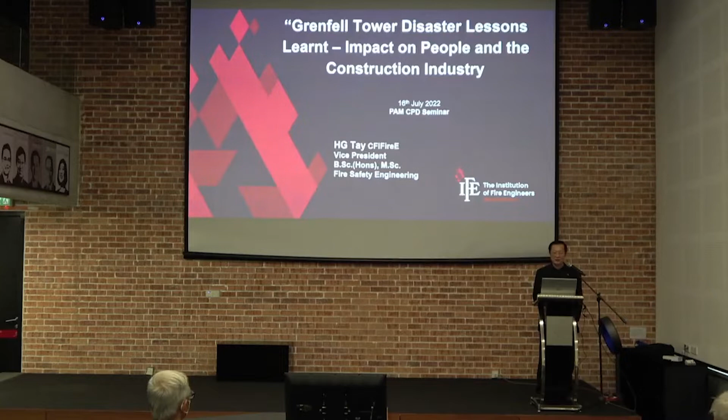I will share with you that the lady, Judith Hackitt, was asked to actually conduct an investigation. And actually, a lot of professionals found at the end, can a fire disaster be prevented? The answer is definitely yes, provided all construction stakeholders carry out their duty diligently. That means everybody, from the government down to the professionals, down to the AHJ, down to the manufacturers, suppliers, contractors, and the like. Everybody carry out their duty diligently, with competency.

I'm not saying that fire will never happen. Murphy's Law, you can never stop a fire from happening. The question is, are you ready to handle one? Are you prepared to handle one? Or are you ready to actually try to minimize the risk that a fire can happen? If not, don't ever think that Grenfell Tower can only happen in the UK.

Okay? Now, if you look back at Malaysia's history, we never have had a major fire with a high fatality rate for the past 20 years. And a lot of what I call stakeholders are assuming that we will never have a fire. I think if you are familiar with statistics, you find that that statement doesn't hold water. Right? Probability-wise, if you understand statistics and probability, if you do not have a fire in the last 20 years with high fatality rate, we are actually getting very close to one. Okay?

Grenfell Tower has just passed its 5th anniversary. But the court proceeding is still going on after 3 years. They divided it into 3 phases. First one is to investigate what happened during that night. Second one, they are looking at interviewing all the stakeholders, or whoever, any party that is connected to the case, who will have to testify in court, cross-examined by the lawyers.

And then now they're actually interviewing all the victims. The court proceeding has run into 83 weeks and it's still ongoing. And if you have time, you can go in and actually listen to some of the proceedings. And it's very, very interesting. You find a lot of facts, all right? And a lot of wrongdoings, a lot of faults, a lot of flaws, even in the entire legislative system and structure.

Hopefully, you can learn from this disaster and try to minimize the risk of a major disaster in Malaysia. We always say, do not go through the painful experience yourself; try to learn from other people's experience. And then we can look forward and progress with lesser pain and suffering. So what went wrong is being reviewed during the court proceedings, and it's so interesting, including ex-ministers admitting they did not do something correctly.

Grenfell Tower posed the highest fatality rate since the Second World War. Just imagine, we used to look towards UK as a model. But after the fire, the UK Ministry of Housing actually looked outwards towards 3 Commonwealth countries to have a better understanding of what these countries are doing in terms of fire safety policy and practice. They picked Canada, Australia, and surprisingly, Malaysia.

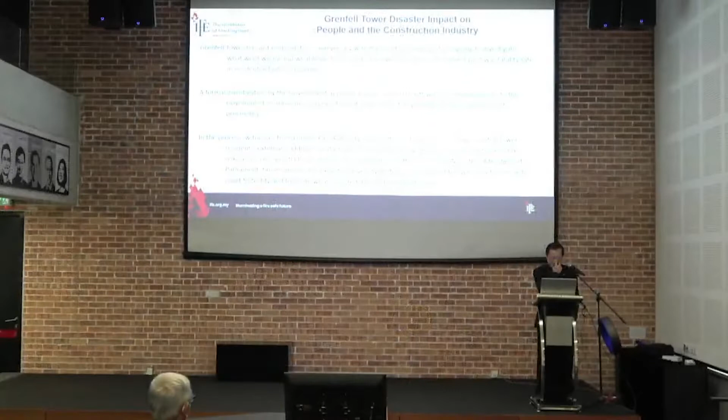During the investigation, a lot of interviews were conducted with London Fire Authority senior officers who were at the site that night, firefighters on duty, Grenfell Tower residents who survived, external cladding manufacturers like Kingspan, testing laboratory officers, building controllers, fire risk assessors, architects, local councillors, government officers, former ministers, members of parliament, fire engineers, fire experts, university professors, and relatives of the victims.

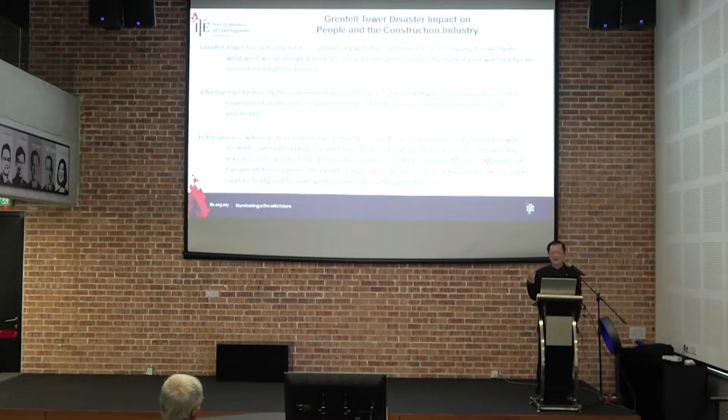They all were called to court to testify. And it's so interesting to look at this. When you go to court, you get no chance to explain what you're doing because a lawyer will only ask you yes or no. So there's no defense, because the court case is moved in such a way.

Out of the 72 occupants that perished during the fire, and this is not the actual figure because there were a lot of occupants in that building that night who weren't registered and recorded, so the actual figure is actually much higher. There were also some illegal immigrants who took shelter in their friend's apartment.

Of the 72, 15 are people with disabilities. And they are now in UK debating whether they should look after this group of special people. My goodness.

Government actually reversed, made a 360-degree U-turn to not enforce the regulation for building owners to look after this group of people in UK now. Can you imagine? Here, we are looking towards how to give provisions to people with disabilities in high-rise buildings, in mega shopping complexes, because they are people who are not normal.

And can you imagine, 17 of the 67 children perished during this fire? They are the future. So the conclusion is the failure of the legislative system.

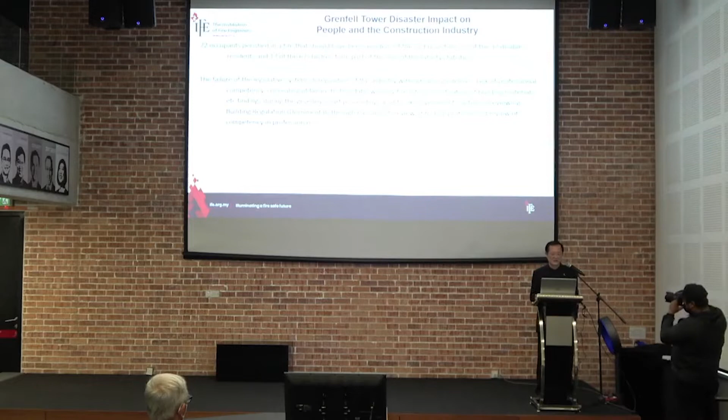So now, after this particular incident, document B, codes and standards in UK are all subject to review now because they cannot be used anymore. And the UK Parliament just passed a new fire safety bill, tightening up a lot of areas which are loopholes.

Small sample tests are no more reliable. All right, so now that's why we are going for BS 8414 test of full-scale external cladding systems.

The external cladding aftershock, which caused the Grenfell Tower fire, will also impact on the entire construction industry, where buildings are installed with external cladding of similar type as Grenfell Tower, or any other cladding that is combustible.

You know what happened is, now all the building owners understand this cladding is combustible. Now, if you are an apartment investor, do you want to buy one of these buildings? No. Okay? These are for new projects.

For the existing projects, the value becomes negative immediately. It's because the government's ruling is that all building owners who have external cladding that is highly combustible have to remove it at their own cost.

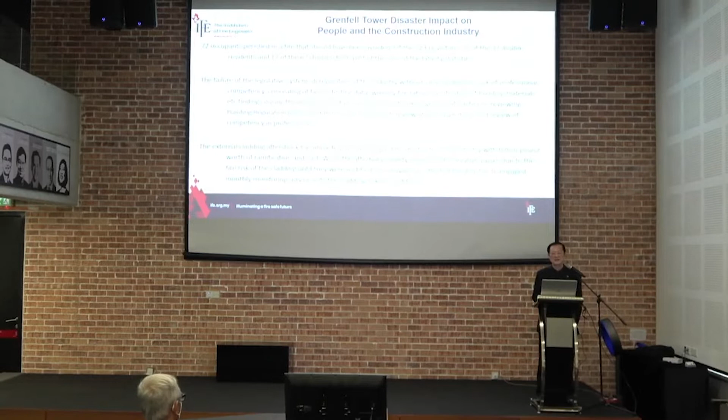Be very careful when you select external cladding, even though they are tested to BS 8414. Read the test reports. I think that's more important because most of the time professionals are so busy. I don't blame you, but if you do not read, you do not know how the system was tested, what material they use. The first line of defense is to go into the material science. Start looking at what they use. If it is highly combustible, you want to be very careful.

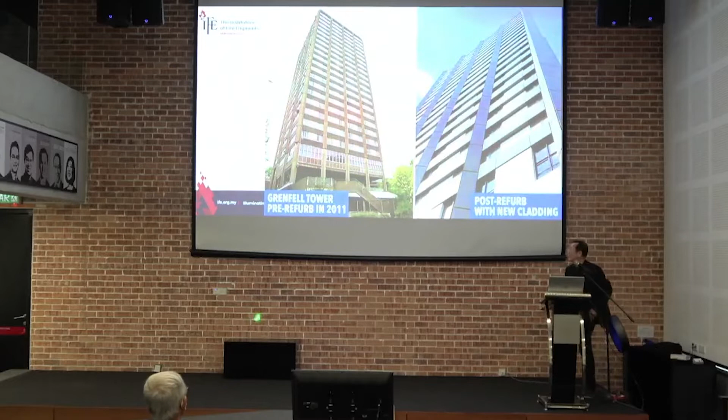That is the old Grenfell Tower. Now why it is being refurbished is because it's sitting - this property is a post-war building, and it's sitting in the Kensington area. It's a posh area where Princess Diana's palace is somewhere around the corner. So the local council think that it's an eyesore, so they refurbish. But out of the total sum allocated, zero sum is actually allocated for upgrading the fire protection system. In this particular building, there's no sprinkler system, the fire doors are failing, there's no pressurization system, they're using a single staircase. And worst of all is that they put highly combustible cladding externally throughout.

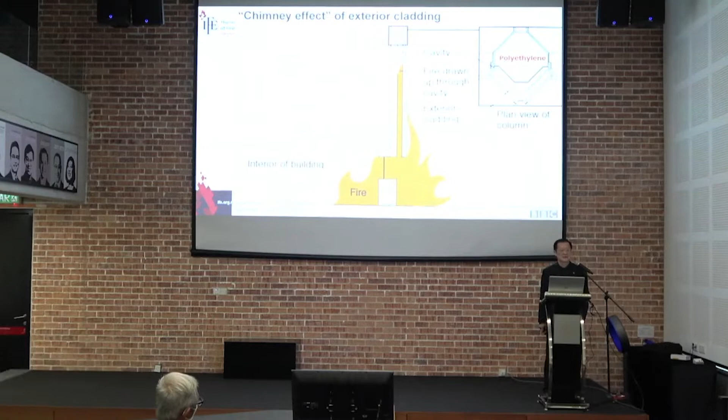This particular fire actually happened on the 4th floor, in a freezer. This freezer is actually a very famous local brand, bought over by a Chinese company. Instead of the metal casing, they changed it to plastic casing. And of course, during manufacturing, a lot of things were downgraded, and they had a fire.

London Brigade was actually called. They put out the fire and they left, but the fire reignited, and that's the end of the story. Fire broke the window, caught on the external cladding, and it spread like wildfire.

You can see the polyethylene is still there at some of the places.

Two types of smoke particles. Black is from organic material, wood and all that. When you see whitish or grayish, you better run - they are from synthetic material that is highly toxic.

I always joke, if you die, it's better during a fire. If you live and you inhale smoke particles that are carcinogenic, you might contract cancer, lung cancer, and suffer for another X number of years before you pass away, wasting a lot of money in curing.

So a fire is actually a very serious matter in terms of fire safety design, and I think the approach we have to take should be diligent.

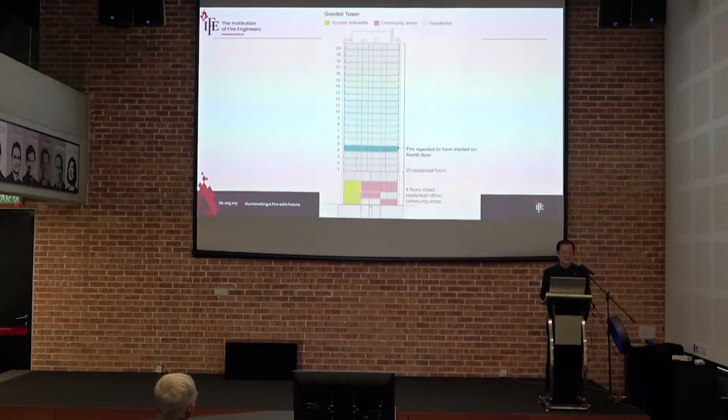So that is the side elevation of the Grenfell Tower, 20-story. Fire reported on the 4th floor. And this is actually an apartment, not a condo - an apartment.

Pre-war, there's not much regulation, so they designed it where all the apartments discharge into a common lobby, which houses a lift and a single fire escape staircase. Fire doors in the UK are generally only 30 minutes rated.

But after Grenfell Tower, the government decided to test all the door suppliers in the UK, and none of them passed the test of 30 minutes.

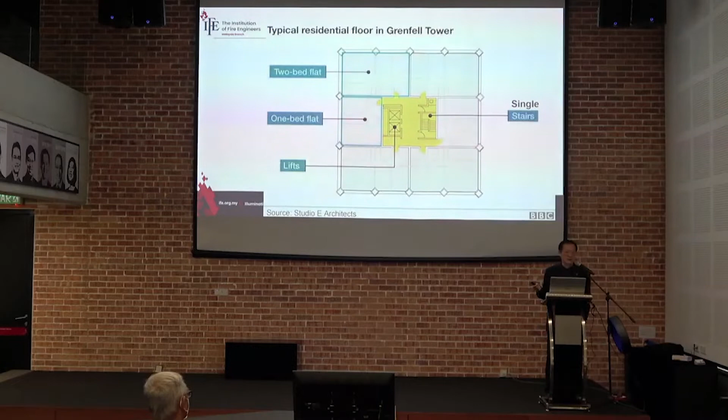You think Malaysia is doing better? Wait until I show you the photo.

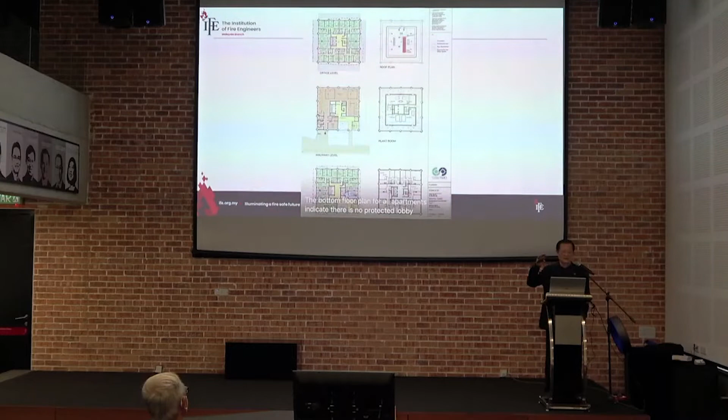So they have different configurations. As I say, below the 4th floor are actually shops, and above that, all apartments.

And what surprised me is the fire escape staircase - a single staircase that comes down from the 24th floor to the 4th floor, stops there. You've got to now travel through a corridor, I don't know whether it's protected, to another location to get down to the ground floor. So the staircase is not continuous.

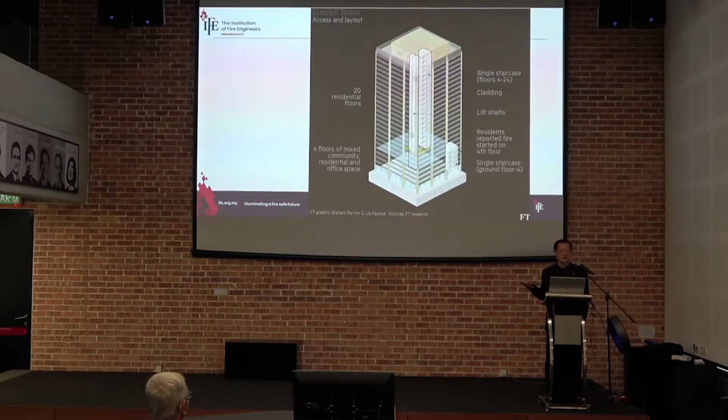I also do not know why the architect designed it this way. It's crazy, isn't it? Imagine the fire actually filling up the corridor and all that, including the staircase - what are your chances of egress?

Fire started here, and then because of the highly combustible cladding, it wrapped around the whole building at super speed. Okay, you look at that.

12:54 a.m. - that is the time when people started to go to bed. By 1:15, people on the 17th floor then start to realize that something is happening. By 1:30 a.m., the flame had already gone around the building. So it's actually a very, very short period of time.

There's no fire detection alarm system in the building, so you need your friends to actually inform you. Otherwise, you're high up above, you never know what's happening.

Even with the alarm ringing, let me ask you a question - how many of you really take a fire alarm signal seriously? When you hear a fire alarm in a building, do you walk out of the building, or do you still carry on shopping or doing your work? You want to think about that.

I always advise, when you hear the fire alarm, leave the building. Probably you'll be the one who has the last laugh.

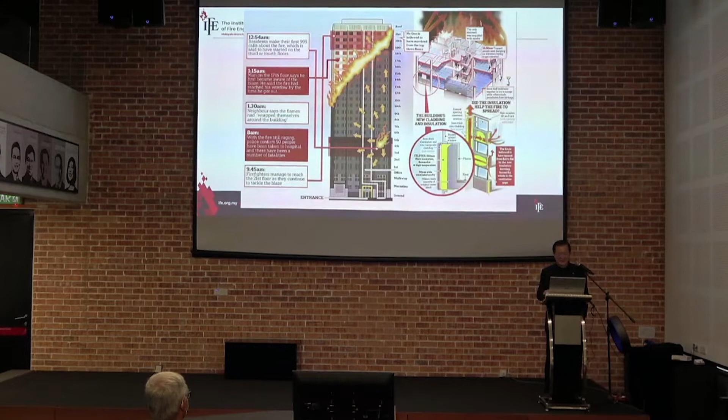Here this shows only one fire escape staircase. So I know a lot of architects are under pressure to actually design a single staircase. You want to think about that.

But I do have a solution whereby, if you do not sacrifice lettable floor area for low-rise buildings, you actually have a solution that we were already using 30 years ago. And it was abandoned - I also do not know why. Because all you need for low-rise is actually an alternate fire escape. It doesn't matter the shape, doesn't matter the size. Because it's low-rise, you do not have to actually enclose it like high-rise buildings.

Just now I showed you how the construction of the external cladding is configured. Okay, 6 inches of polyethylene attached to the building surface. They have actually a 50mm gap cavity, and then the finishes of aluminum outside.

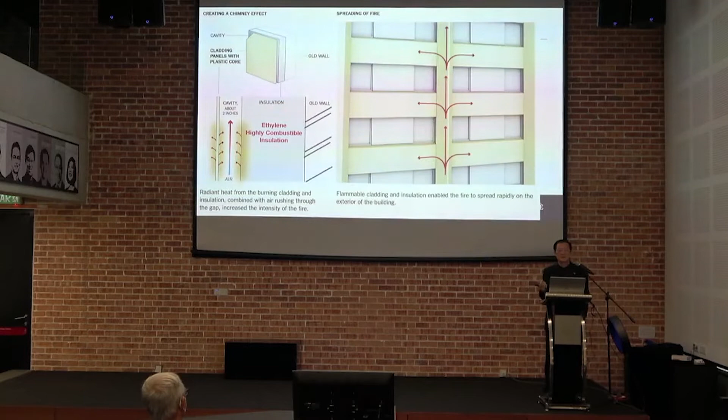If I was discussing with my peers, if the council only clad horizontally and forgot about the vertical column, then the fire is not too bad. Because when the fire started, it spread from here, and when it hit the vertical column, you just imagine, vertical fire spread is faster than horizontal. So it goes up, and then it starts to spread like a tree. Okay?

So I always say, why do you have to do something that actually encourages a disaster? If it stopped there without the vertical cladding, then the spread would not be that bad.

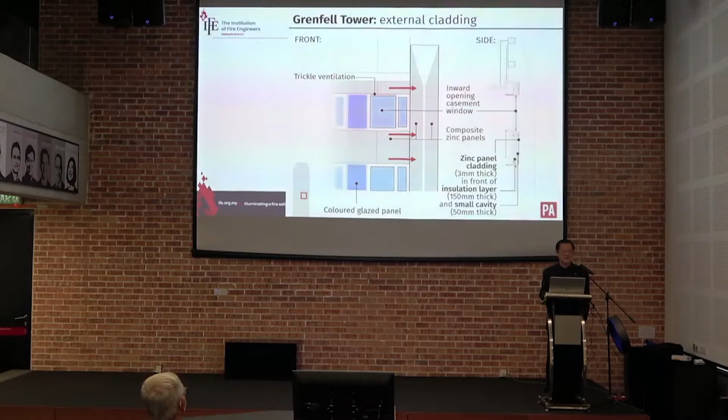Different stages of fire - look at the temperature and the color of the fire. As I pointed out, if it is white or yellow color, the temperature is very high.

And there are already fire incidents, including an explosion in Tianjin, China. And the latest one is about 2 years ago in Beirut, Lebanon. Until today, they still cannot find the bodies of the firefighters - virtually evaporated.

From about 4 something until about 5 something, it's still burning. And do you know that the fire investigators cannot enter the building immediately after the fire? Because the heat trapped in the building takes a week to dissipate.

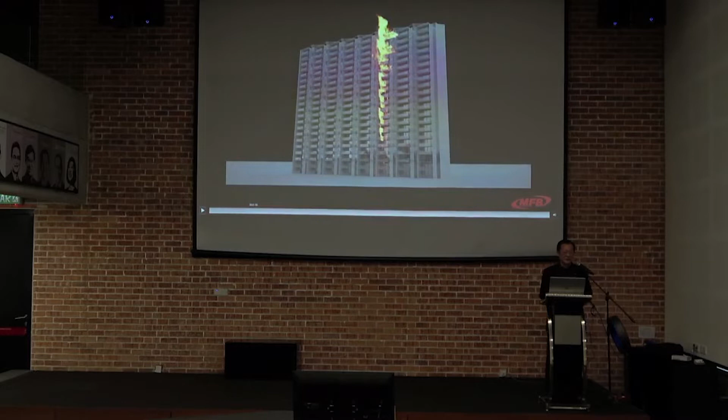Of course, the apartment owners were asked to leave the building because it's not fit for occupancy. But they have to pay the loan they secured from the bank. At the same time, they've got to rent a place to stay, so they are losing money. So they group up and sue the developer. The developer sues the contractor.

So the contractor says, my goodness, I've now got this bill in my hand, it's 12 million. Okay, so he said, okay - I think probably his advice was, you engage architects, engineers, and building controllers to help you design, sue them for professional negligence. And that's exactly what he did. At the end, he only picked up 3% of the bill.

And the insurance industry suddenly woke up - oh my goodness - so they cancelled all the professional indemnity insurance in Australia overnight. The whole market was jammed until the Australian government had to step in and set up a special fund. This now becomes the precedent in legal process, and it's going around the world.

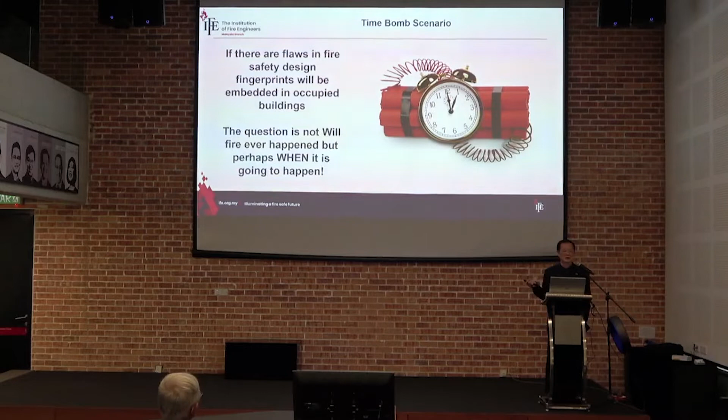This happened after we visited, myself and the fire rescue department visited the Shanghai Fire Rescue Department. They are very well equipped, one of the best, and yet they can't do anything. It's because this is a planning issue.

Now you want to think about the wet riser design. In Malaysia, we only design for 3 outlets. Do you think it's enough? Because one of the residents on a higher floor complained there's no water coming out of the wet riser outlet. So we have to review. It's not just calculation, no. Is it fit for purpose?

Okay, that's the first paper. We have heard enough of the problems that we encountered at Grenfell Tower. Lesson learned. Normally what you want to do is learn from other people's experience, and hopefully it doesn't happen in Malaysia.

Okay, so in the second paper I'm going to talk about holistic fire safety design approach. During my talk, if you have a question, you can raise your hand. You don't have to wait until the end. You can raise it anytime. If you think you need clarification or whatever, just ask me.

I pointed out that we need to actually understand our enemy - fire. So if you are looking at sustainable fire safety engineering as a futuristic design, then you need to understand, you have to learn more. I'm quite sure all of you know the search engine, you have a smartphone. In the morning, during breakfast, you can start reading a lot of information on the website.

So once you understand fire, then you review what you have been doing, and you understand there are a lot of areas that you need to improve. Why? Because fire actually generates heat, and heat and temperature are no joke. Then, of course, a lot of materials cannot achieve complete combustion.

Then you get smoke intensity, and this is the one that obscures vision during egress. Now, a lot of synthetic materials come with toxic gases as well, and some of these are very corrosive.

Imagine telecom - they have tons of PVC cables. Do you know what is in the air if it burns? Hydrochloric acid, from PVC. We have moisture contained in the air, and the droplets straight away become hydrochloric acid. And you know where it goes? Unless you apply the waterproofing membrane from the sponsor this morning, it's going to be absorbed due to capillary action of the pores in the concrete, the reinforced concrete, and attack the rebar.

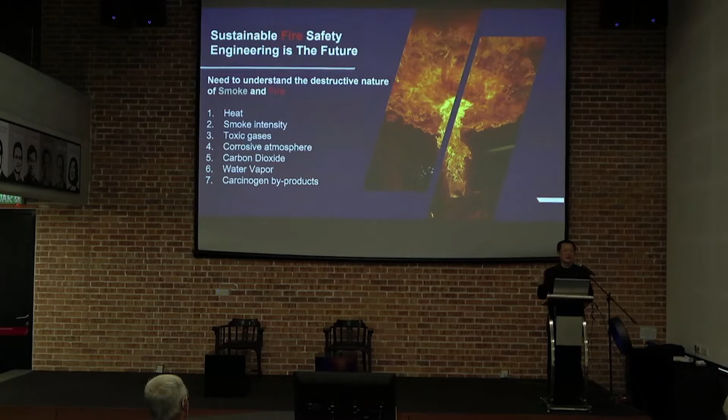You don't need a lot to kill people in a fire, okay? You won't be burned to death, that's for sure, because most fire victims die from smoke suffocation and inhalation. A lot of people experienced COVID - that's exactly the feeling if you walk in a smoke-filled environment. Same thing - lack of air, you cannot breathe.

UBBL requirement, myth versus fact. Can anybody tell me what Class 0 rating is? Lunch is waiting for you if you get the right answer. What is Class O? So popular - everybody talks about Class O on the market. What is Class O? Come on, a lot of you are AR. Maybe there's some IR here too. What is Class O?

Let me show you - it's actually written in Bylaw 204: Classification or restriction of flame spread over surfaces of walls and ceiling. It says, for the purpose of this part and the 8th schedule to these bylaws, any reference to a surface being of a specific class shall be construed as a requirement that the material of which the wall, ceiling, or soffit is constructed shall comply with the following requirements. And Class 0 is a surface of no flame spread. How many of you use Class O that actually has Class 1 flame spread index, and you think it's Class O? It's never Class O.

Any reference to a surface being class 0 shall be construed as a requirement that the material of which the wall or ceiling is constructed shall be non-combustible throughout.

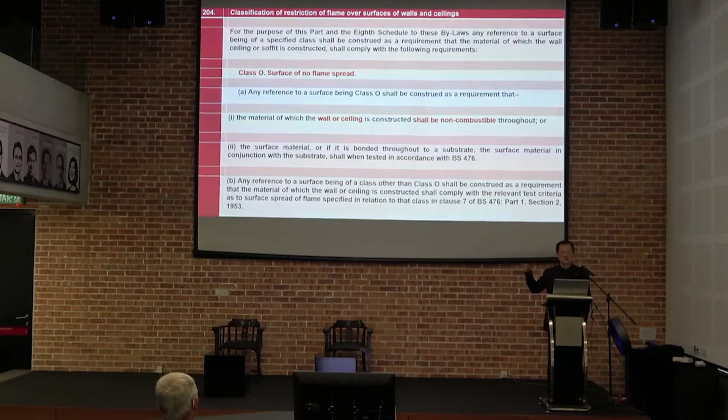This is not even the standard. It is UBBL 204, a legislative requirement. Please go back and look at your specification again.

And what is BS 476 part 6 fire test? Let's look at the test and you tell me how relevant is this to actually certify a material.

The furnace is very small. You put a small sample and there are 2 heating elements. You subject it to that kind of heat for a very short period of time. It's a small piece of material, not even the entire system. Imagine you test insulation or anything in a massive external cladding system. How this test relates to the overall functioning of an external cladding system, I don't know.

That's exactly what Professor Jose Torero pointed out. What relevance? There's no relevance. Everybody just assumes it's going to work.

Looking at the way it's being tested, you will straight away realize, anyone with common sense will straight away realize that it's not relevant. You can't use this. You can't base your decisions on this.

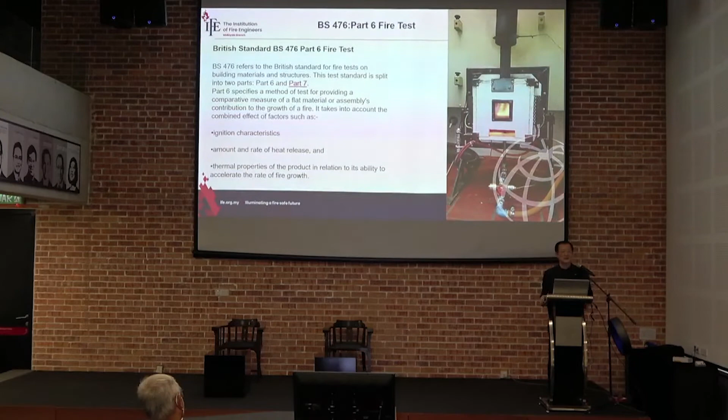Let me see whether I can get this to work. Okay, watch how the material is being tested under part 6.

The BS 476 Part 6 test equipment was developed for the UK construction industry, but is also used by other industries today. We're comparing the performance of our test material against the performance of a non-combustible board. We take the specimen and clamp it into the test rig, then expose it to both direct flame and a radiant heat source. We are taking temperature measurements in the chimney of the test equipment. By limiting the heat released from materials, we're allowing building occupants more time to escape from a fire.

That's all. Part 6. The BS 476 Part 6.

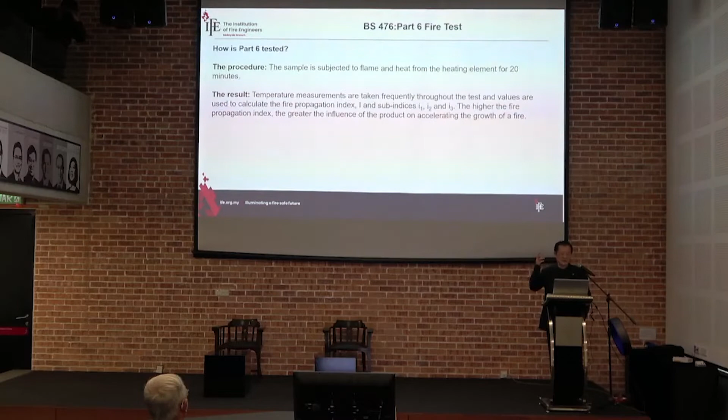So you're looking at subjecting a small piece of sample to flame and a heating element for 20 minutes. How long do you think a fire is going to last? What is the temperature of a full-scale fire? You see the full-scale fire temperature just now in terms of color gradient. Do you think this test can actually fully represent the actual condition when you apply the material? If it is not, what is the relevancy?

Why are we not reviewing? You can now wake up. They are taking a look at everything they have been doing and following for the last 30, 40 years, and suddenly find out, oh my goodness.

We need to start thinking. Problem now is that everybody just does a fast food style. They want an immediate answer, but they don't understand why. You have to think, review, and analyze. All right?

If this is okay, part 6 is okay, then you go on to part 7, all right? And there is no fire. This is only a pilot flame and a radiant panel. Tell me, does it actually reflect a full-scale fire scenario?

The BS476 Part 7 test equipment that we see here has a long history in the UK. It was developed for the construction industry, but has since been adopted for other applications, such as the UK defence industry and train projects. We use the test to assess the spread of flame across the surface of a specimen. The operator will take visual observations looking at how far the flames have spread along the reference line drawn onto the test specimen. Only flaming on this reference line counts towards classification. The further the flames spread, the worse the test result.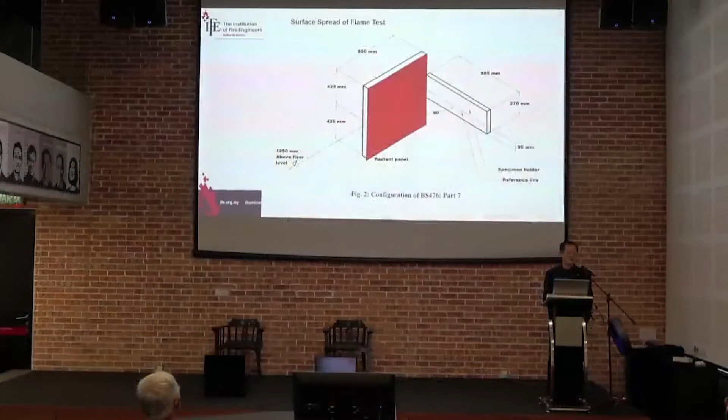Radiant heat, there's no even fire. Only the pilot flame was there to start the fire and then they remove it after 1.5 minutes. So class O, class 1, class 2, class 3, class 4 - the way I look at it, it doesn't give you any comfort at all. What do you mean by surface of very low flame spread?

Now when you look at things like that, even though you're looking at 6 inches, it's still burning. And then it depends on the material - does it give out toxic fumes? Is it being applied on the escape path? A lot of this material could end up in the corridor.

So to recap, facts against market misconception: Class O is surface of no flame spread. You all got a copy of the UBBL, go back and take a look - 204, okay?

I think it's time for UK - I think they're in the process of looking at the EN European norm, that's EU standard, for building material classification. Taking a material and burning it is only one part of the test. I think you need to understand a bit more of how we classify building materials.

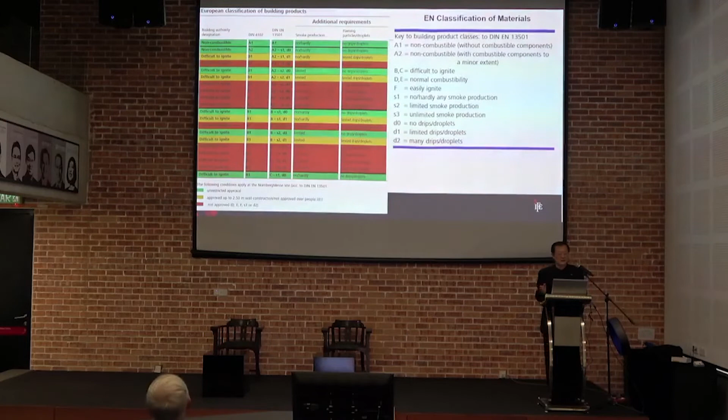So in this particular EN test 13501, they also look at S, indicating smoke intensity - if you can burn, how much smoke it's going to generate. So you've got S1, no smoke or hardly any smoke production. This is almost equivalent to gas already, all right?

S2, limited smoke production. S3, unlimited smoke production - that means I give you a lot of smoke. So if you are using some of these materials for egress routes, you know how to select. It gives you better guidance.

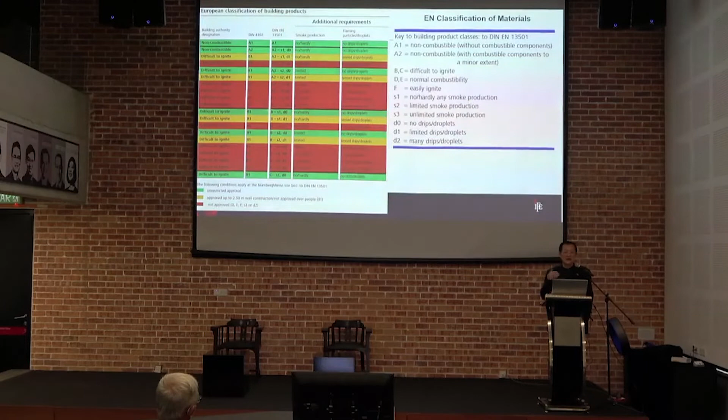Then you look at D - does it drip? Does it help propagate fire? So you've got D, 0, 1, 2, okay? So you can see that the European standard is so much clearer now, very much more advanced. And they give you clearer guidelines for professionals to select - building owners, interior designers, things like that.

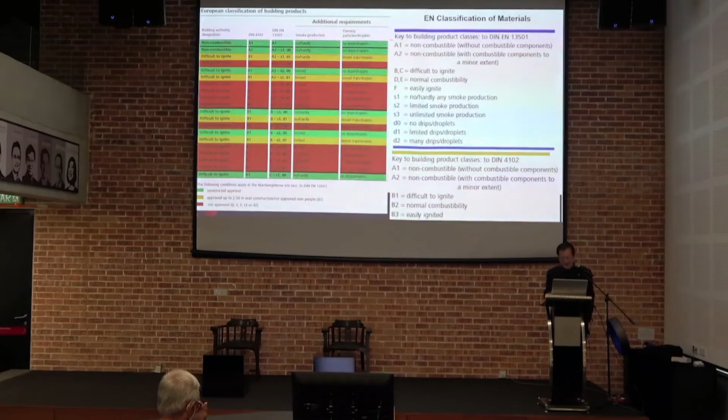So this is actually also taken up by DIN 4102. DIN is actually the German International Standard, and I can tell you DIN is very, very advanced. I visited DIN headquarters to have a briefing by them. At that point in time, about 8 years ago, they already had about 20,000.

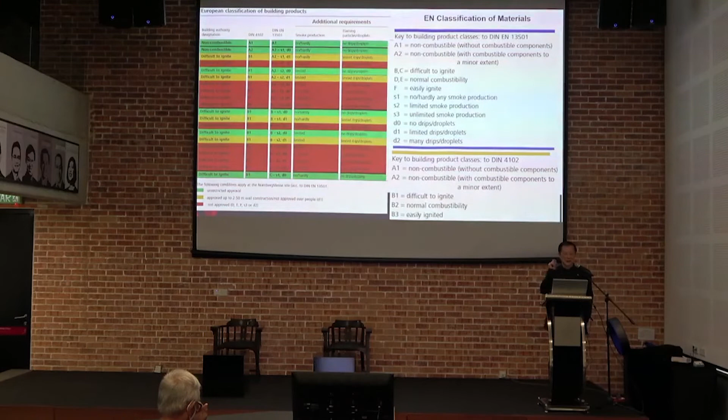Now I think it's more than that. Malaysia is still struggling, I tell you. They even have a standard teaching you how to develop a standard, and they also have a standard telling you how to conduct a funeral. Germans are very meticulous, very, very good, very systematic.

So if you go back and look at it, this is only B1, B2, all red - you can't use it, okay? They don't look at class O. Seriously, they are looking at - you must comply with all these three criteria: combustibility, smoke index, and drip index.

Now let me come back to the assumption, and it's so critical - you don't just talk prescriptive. We have been looking at the flow and the pressure required out of a hydrant or a hose. There are a lot of misconceptions, and I'm sorry to say this from professionals, because the moment you reduce the flow and pressure, you save the pump size, you save cost. But they've forgotten that the frontliners' lives are at stake if you don't give them proper pressure and flow.

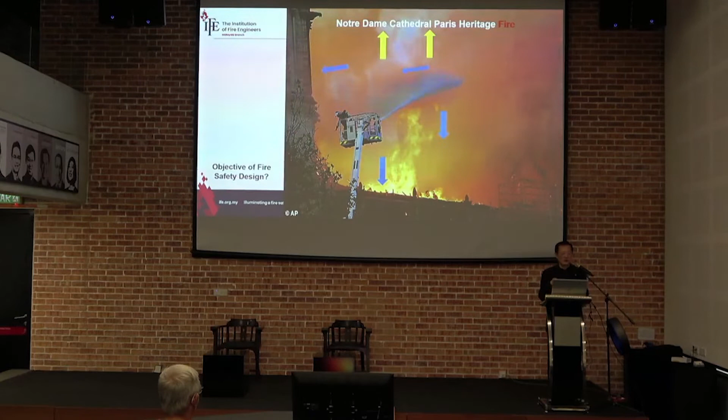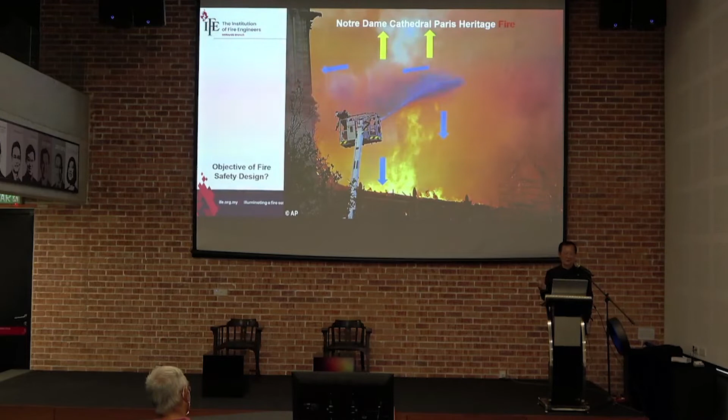So in places where the risk is so high, they actually have to raise billions to rebuild. And even after rebuilding, they'll be declassified from the United Nations Heritage Site status - gone forever. Talking about that, Malaysia is very lucky - we have 2 cities designated as United Nations Heritage Cities, Malacca and Penang.

We've got tons of problems in these two cities. Go and take a look at Malacca - a domestic home is about 120 feet deep, single staircase, floor all wooden, staircase all wooden. And at the back, there's no back lane, because the Portuguese built a wall dividing two residential units. Where are you going to run? If the staircase is burned, if the fire is happening in the front where the sitting room is, you need to think.

Then you need to come up with solutions. I've actually proposed this to architects dealing with heritage - we had a few seminars before. When you convert a residence into a hotel or hostel, authorities will definitely want you to put in an alternate staircase, modern and closed. How are you going to do that? Because the heritage council refuses to let you renovate heritage buildings - the moment you touch their building, it's no longer heritage. So you've got one council against it, and you've got authorities you have to comply with under current regulations, so the architects are caught in the middle.

So I told the architects, why can't you go back to 30 years ago when we just used a single spiral staircase, two-story, and didn't have to enclose it? If the staircase has natural ventilation, you don't have to enclose it. One story, cheap, good, and doesn't occupy space. So there should be an alternate solution. We can't always just look at the bylaw - you need this size, you need a handrail, you need to look at the riser, the tread, and all that. Why are we so tight and fixed without thinking? There's no more flexibility. We don't analyze, we don't look for solutions.

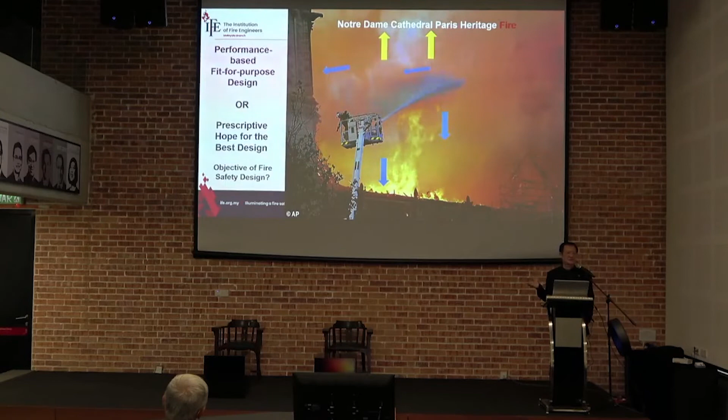Non-combustible building materials always survive fire incidents, but I know that's impossible to guarantee everywhere. So what you have to do is select them for critical areas. Other areas you might still have to give and take. I'm not the type that says it's one way only.

I always tell my friends, I can close one eye. If you ask me to close two eyes, I'll become blind. So you can close one eye if the condition doesn't allow, that's fine. But you cannot always close both eyes, right?

So you must expect the unexpected. You need to conduct fire risk assessment. You've got to think and look at what risk you are looking at. We design without fire risk at the moment, because the prescriptive code tells you 2,000 meters square, you put in a sprinkler system, and it's okay.

Factory Mutual Global conducted a lot of full-scale tests that prove sprinkler system effectiveness for high pile storage has been reduced from 95% to 70%. Why? I can tell you this fact, but you cannot quote me because you do not understand why. I can tell you why.

Last time we packed things into carton boxes, or open boxes made of paper. When the sprinkler operates, the water can filter through to the lower rack where the fire happens. Then we pack the goods into these carton boxes, and to prevent moisture from getting in, we apply a coat of wax outside.

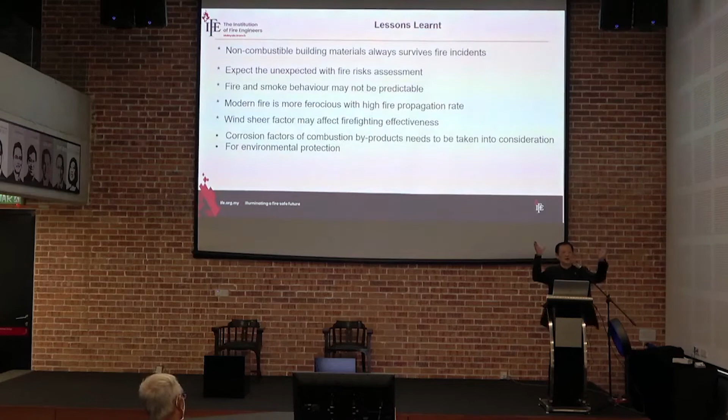Now we're also looking at tank farms with sprays and deluge systems. When the tank heats up, the metal expands. The pipe will be dislocated because the pipe is so small. When the pipe is dislocated, even if a pump is running, what fire protection system do you have?

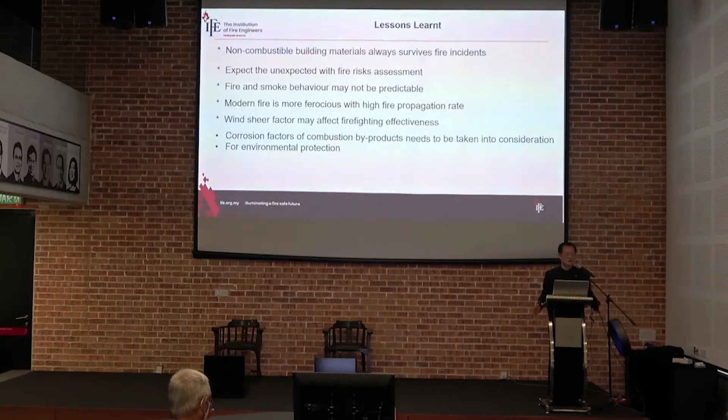So it's not just designed according to UBBL, designed according to standard, designed according to whatever, and then you think it's going to work. No. Please look at the actual case. Analyze and start imagining what is actually going to happen on the ground. Then think, look at your design - can you cope?

If you cannot cope, then there is a lot of problem. If you sign off, that's one of the problems - damages, people get killed, and all these other problems.

Corrosion factor of combustion byproducts needs to be taken into consideration for environmental protection - I will talk about it. Organic material poses a higher flammability index than non-combustible material. So if possible, use something that cannot burn. Even if you spend slightly higher, 20%, even up to 30%, I would still do it, because return on investment is definitely worth it.

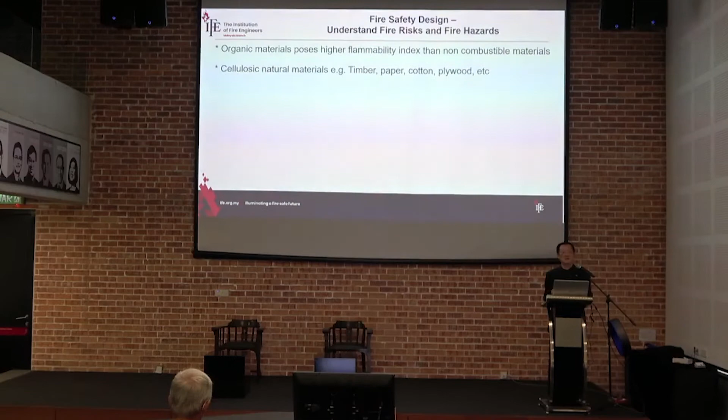You should not be looking at post-fire. At the moment we are still tuned into designing for post-fire - let's fight the fire when it happens. That's a lose-lose situation. We should be looking at prevention, the pre-fire scenario. How can we build in all the safety features that hopefully reduce the risk of a fire happening? That is a better strategy than fighting a fire, because you're going to have smoke damage, fire damage, and water damage. Let me tell you, water damage sometimes is much more than fire damage.

I'll quote you so many cases. In Singapore, Jurong East, they have this big plant that produces newspaper print paper. The reels are actually very big. So they keep producing, they keep stacking up, and because of expensive storage space, they only leave room for the workers to go through. But you've got so many vertical surfaces that can burn.

Every year, at least 3 fires happen. When the fire starts, they call the fire brigade. Singapore Civil Defense is very efficient - they go down there and put out the fire.

Fire damage, burn and all that, 20,000. Water damage, 250,000. All these could be thrown away. Where's the logic?

You don't wait until you already know the risk is so high. You've got to re-look at your risk and do your risk management.

Cellulosic, natural materials like timber, paper, cotton, plywood, these are organic. But synthetic now is rampant, especially hydrocarbon-based plastic, your car, everything that you use from computer to your handphone to your gadgets in your home, a lot are synthetic, and be very careful.

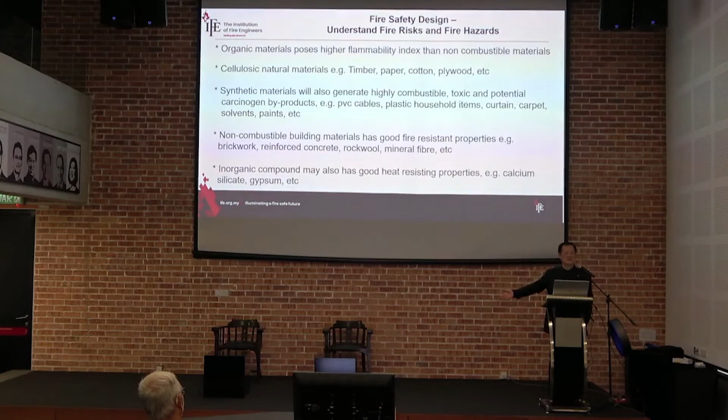So there are many materials on the market for you to choose. But please, do not put price as your first choice of selection, because you might have to pay very much more later.

So fire risk is actually one of the prominent factors that you have to consider if you are looking at design, because for fire safety you have to look at fire risk, which is at the moment missing. High fuel load, timber flooring, insulation materials where they're classified as green - I understand conservation of energy, but if it burns, it becomes brown.

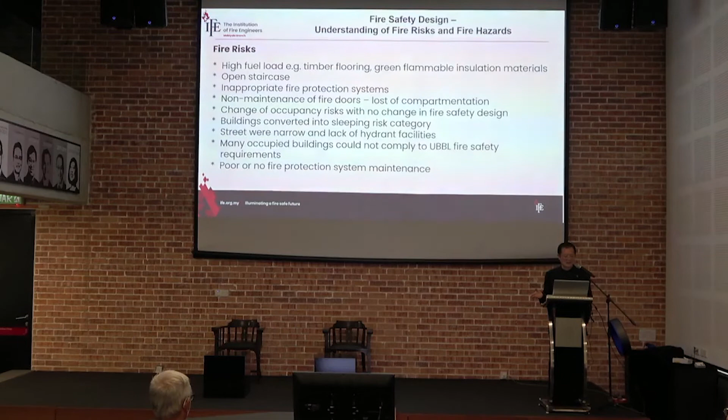Open staircases, unless it's naturally ventilated. Fire protection systems in Malaysia - let me tell you, by the dictionary, you cannot find the word maintenance inside, because there's no maintenance in Malaysian culture. Non-maintenance of fire doors, we just had a discussion during tea time.

And so many people are so confident: the fire escape staircase in my condominium is going to be smoke clear. Are you sure? I, for one, know that it cannot be. You've got a pressurization system - you look at the design.

How many doors do you think are going to open during an evacuation, a mass evacuation? Think about it.

Secondly, pressurization is only feasible if all the fire doors on each of the floors are in full functional condition. Who maintains fire doors, you tell me? So many times I see fire doors held open with a portable extinguisher there. Do you think you have your pressurization? And you still live in the false pretension and security that I am protected.

You want to buy more insurance? Look for Tong Li Xiong. I'm not kidding. And I will never buy a condo that is so high up.

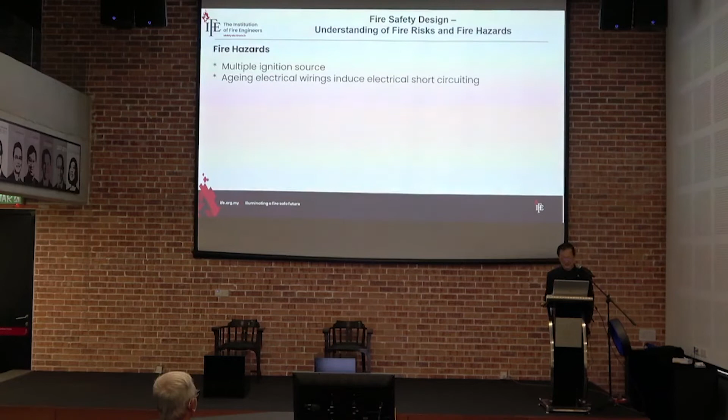So there are some of these, I won't go in, but as I say it's relevant. And then you've got to look at the fire hazards, because the fire hazard is the one that triggers a fire. The risk is the fuel load and the probability that fire is going to happen. So multiple ignition sources, smokers - of course now with no smoking rules it's even worse, because there are a lot of people who sneak in smoking. And then when somebody comes, they simply throw the cigarette butts, and then you've got a fire. Aging electrical wirings, short circuiting, fire certificate.

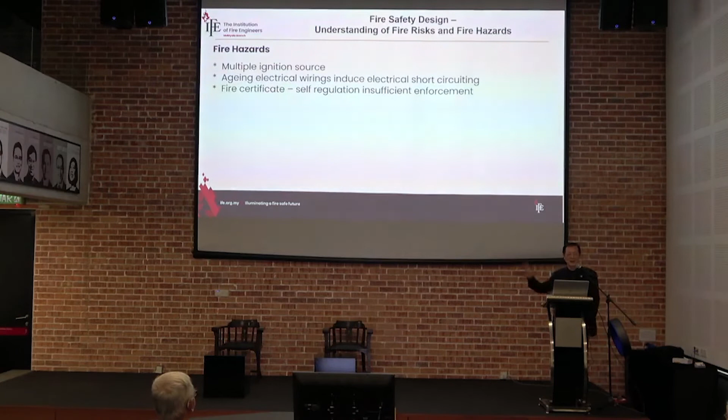Talk about the fire certificate - a lot of owners say, I got a certificate from the fire authority, they approved my building. I say, are you sure? Did you read the Fire Services Act 341? Please read it, okay? You self-declare to the authority that every system, active and passive, in your building is in perfect working order before they give you the fire certificate.

It's self-declaration. They engage a contractor - I don't know how the fire contractor checks all these important code compliance requirements - and then who signs? They pass it to the manager to sign. The contractor didn't sign, he just ticked all the boxes, because if you don't tick the box, you never get your fire certificate. So 8 pages of boxes, you tick everything, despite the fact that they never inspect the door. They don't even know how to inspect the door. They still take it.

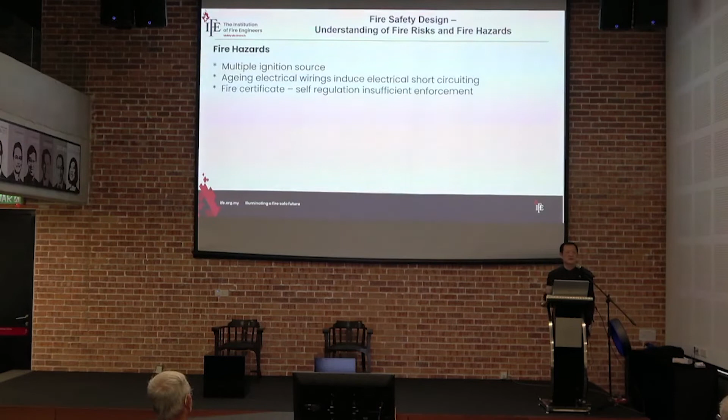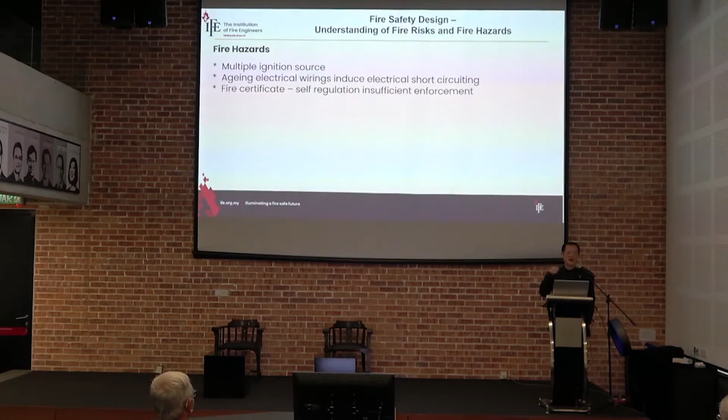Then you'll be thinking, wow, this contractor is so good, huh? I apply, sure, I get my fire certificate. Because they're not responsible - whoever signs is responsible. I hereby declare, you sign with your name, with whatever's there.

Okay? So you actually need, for all the existing buildings, a qualified fire risk assessor. And IFE is actually conducting a 5-day accredited course now to teach everybody how to do this properly. And it's very, very complete because we cover all the topics. We teach you how to go beyond the codes, standards and regulations. No competence in fire risk assessment, and nobody cares.

But they never look at the loss figure that's so high. I'll give you another example - Tomypak. Have you heard of Tomypak Packaging Company International? They invested in a plant in Senai, 300 million, I don't know how many years ago. They just got a fire, I think about 8 months ago.

All the top executives in the insurance industry did not get their bonus, because the total payout for the insurance industry is 300 million a year. You know what happened? The stock value of Tomypak dropped 9% the following day. To rebuild the plant, do you think it's going to cost the same amount as 10 years ago? Of course not, right?

Everything changed - construction material goes up, supply chain shortage, now labor shortage, and some of the machinery is outdated, you've got to buy new ones, it costs more. What about the lost time, the downtime? What about the legal aspect where all your clients are going to sue you for non-supply? There's so many things - bad publicity and all that - and the investors' confidence is no longer there. So you see, one incident might decide the downfall of a corporation.

Means of escape—we design looking at openings and distance, but we've forgotten something. In a mass public assembly area like theaters, how long do you think it takes to get up when you're sitting in the middle of the pack? If you're sitting on the aisle, you get up first, right? But if you're right in the middle of the row, with an old lady with a crutch on one side and someone in a wheelchair on the other, do you think you'll get up in time?

What about the number of exit points? When people queue too long, what happens? They get impatient. So there are a lot of fire incidents, not the serious kind—the stampede casualty rate is actually higher than the victims of the fire itself.

Human behavior is an element that's always missing. We are actually directly opposite from the UK. The UK adopts a stay-put policy because they believe buildings built with compartmentation are so safe that if a fire happens, it cannot spread. Everybody in the UK is asked to stay in their apartment, lock themselves up, and wait for the firefighter to come and rescue them. They call it stay put.

In Grenfell Tower, there were residents who were actually evacuating. Firefighters came and told them, please go back and wait for rescue, and they died. This created so much controversy in the UK - you are actually following a policy that is only good for low-rise buildings.

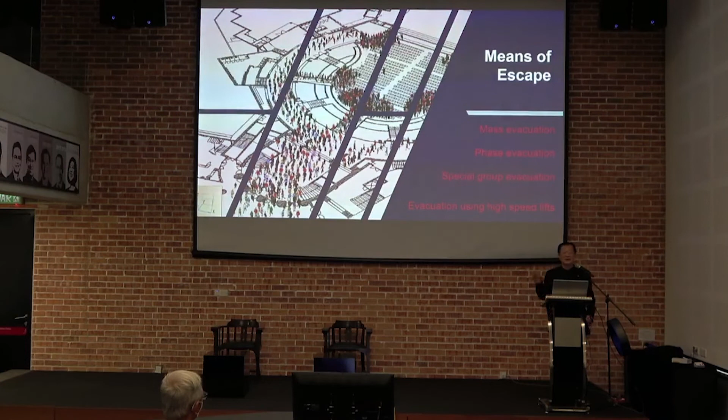When we conduct a fire safety seminar for people with disability, we specially build this ramp so the speakers who are on wheelchairs can access the stage easily. But after that, we get the architect to sit on the wheelchair and say, wheel yourself up here. Then they realize how important it is, because you look at some of these ramps in shopping complexes - even a healthy person cannot push the wheelchair up themselves, and you expect people with disability to do that.

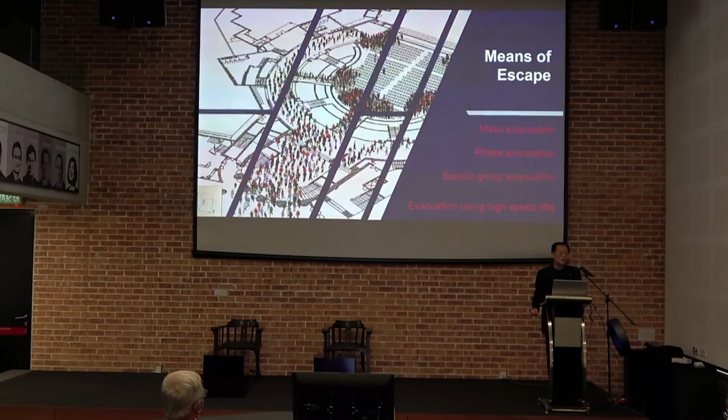Experience it yourself, you never know. But that day, you know what - they challenged me: Mr. Tay, you talk, you do it. Not only did I come out very easily, I could maneuver, I could spin the wheel. You see how do you maneuver the wheelchair? It's not difficult - you have it in mind but you cannot put it into practice.

And they are engineers - the fire detection alarm system in the building, they tell me, I comply with all the Malaysian standards in every aspect, you can check. I said, but nobody will evacuate. You know why? That is the headquarters for the deaf.

You got all the bells ringing. Who can hear? You understand what I'm saying? We cannot just stick to a code, standard and regulation and say hope for the best. No, you got to look at the application at the end. It's no more just standard and all that. I think there are a lot of things we need to actually look at and review.

Let's review. And in China now, they are going a step ahead of us. Malaysia was the first country in the world to use lifts for evacuation - Petronas Twin Towers and KL Tower. But we stayed there. That's it.

China now requires all high-rise buildings above 30 meters to have a lift for evacuation. Not a fireman's lift. Do you know Petronas Tower, how many lifts they have?

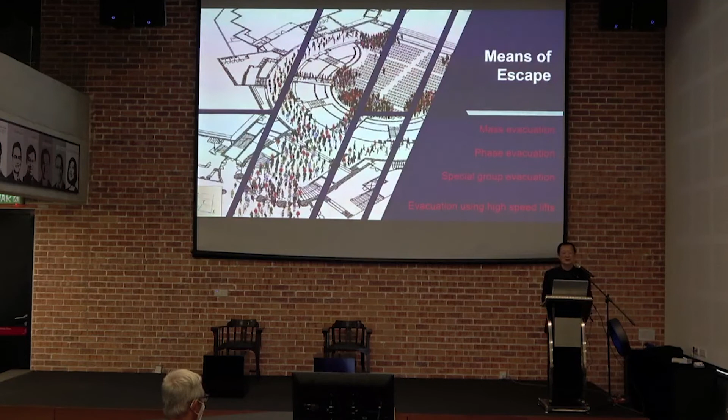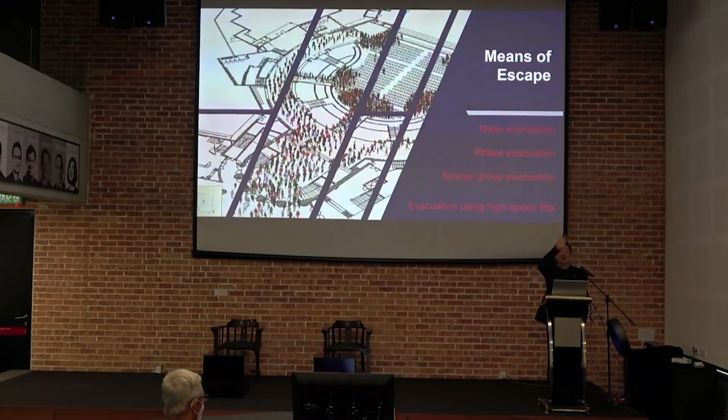Means of escape - how to get occupants out of the building alive during a fire incident. You cannot tell me that I've got a staircase, a protected corridor, pressurization, and everybody's going to get out. No. I'll show you, as I did this morning - nobody leaves. When there's a fire, everybody crowds around and takes photos.

So compartmentation and fire barriers are crucial, because you want to contain the fire or prevent fire propagation. And not just fire - I think smoke is more crucial. When you have a fire, you get incomplete combustion, smoke is generated, and the air expands. It'll be looking for gaps to escape from the room.

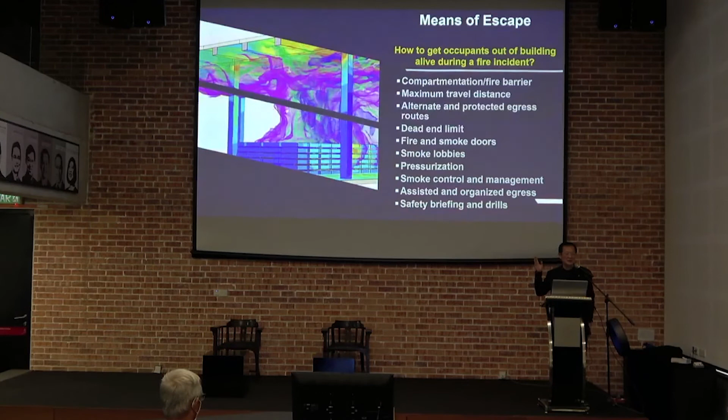And don't forget, smoke carries temperature. Particles coming out from the fire source are 250 degrees C. What is the water boiling temperature? 100. As they float along upwards, why? It's because they're heated particles. They have a buoyancy effect - they're higher temperature than ambient air. That's why it floats upwards.

And then it moves along in terms of a ceiling jet. But as it moves along, it cools, right? Because it radiates heat, it cools down, and then it comes back down. So when the engineer tells me, I will design a 2 meter clear smoke level for egress, I say, oh, your smoke particles are all intelligent, they all stay at 2 meters?

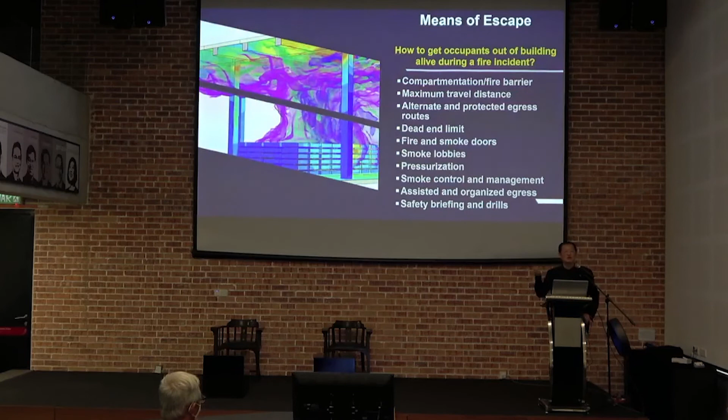Totally complete lack of understanding. These are pure science that you study in school, secondary school.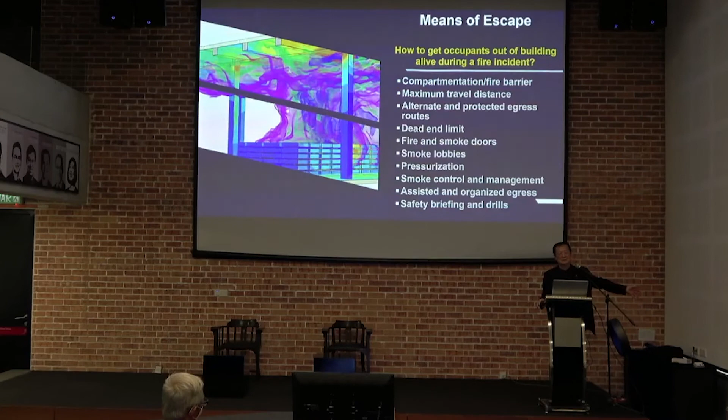So I asked him, how long do you think your smoke can flow toward? He said 30 meters. I said, huh? What's the relevancy of 30 meters? What material is burning first? What is the heat release rate? Different materials burn at different temperatures, giving out different heat. And you are assuming all the smoke will flow to 30 meters.

So I said, after that, what do you do? At 2 meters, I assure you, you get a free haircut - heat is here, your hair will be all gone. And you cannot survive because it's not 2 meters. 31 to 58, I think we cannot finish the slide. Never mind, I will go as fast as possible. But I'm giving you a lot of my experience, okay?

So, alternate and protected egress routes - dead end limit, fire and smoke doors. We still do not have smoke doors in this country. Fire doors only.

And look at all the signboards in all the buildings. It's so congested with all the information that is not necessary for evacuation. Agree or not? We package so many pieces of information. Do you have time to read it? By the time you do, the fire will be at your back.

So do a very simple layout with directional routes, arrows and all that to show people where to go. Don't just pack it with so much information and draw so many lines and details - where is the damper, the AHU, and all that - these are not necessary.

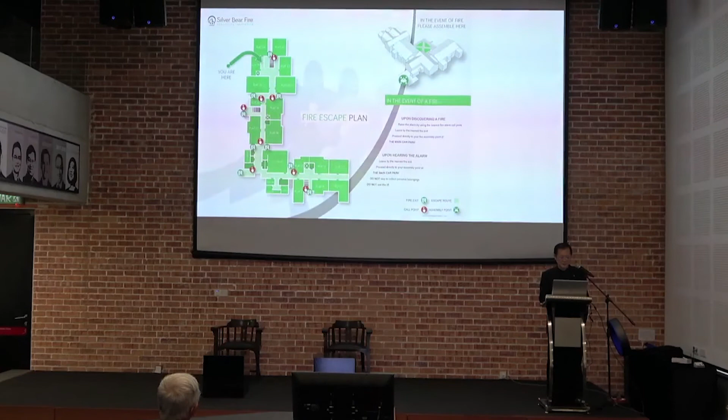Look at that, very easy. It's color green, so you know that anything green is for egress.

I put this on LinkedIn and I created so much interest. I said legislatively we are asked to put the keluar sign on top of the fire door at the highest point. Imagine this floor, this room is on fire, do you think you can see the keluar sign? Then why are we still putting it at that position? Tell me.

You want to think about it? Actually this is at BRE, Building Research Establishment, the burning house, they call it. And actually if you look, this is a fire escape door. There is actually a good sign there. So when the experiments start to run, you cannot see anything, okay?

In Norway, they already incorporate it in the carpet of a hotel. If you go to Japan and Korea, they still put it on top of the door, but they run the word exit with the arrow sign on the skirting level, illuminated. If you go to Osaka airport, Shenzhen airport in China, a lot of international airports now, you can find it on the floor, permanently illuminated. Easy solution, you don't need a full-fledged fire escape staircase, right? At least as an alternate.

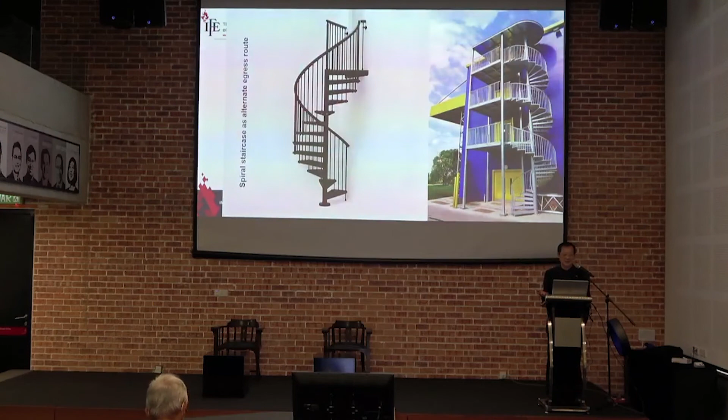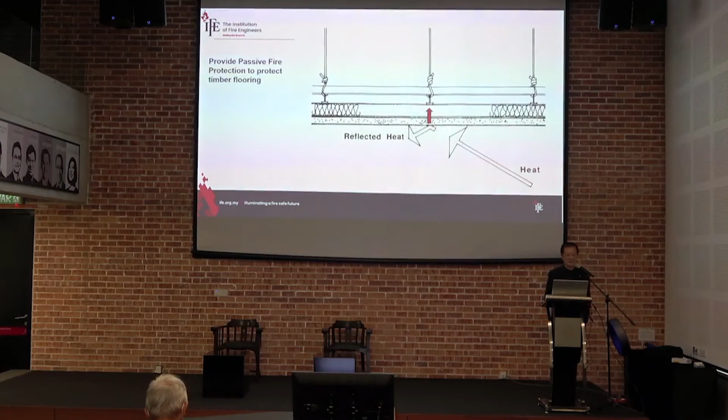And also to stop heat, smoke, fire propagation, use what I call a suspended ceiling that can absorb heat. Otherwise all the heat will be reflected forward. To do that, the heat can be absorbed, then less heat is propagated forward.

And talking about the keluar sign, your EL emergency lighting is the same. We all put it in the ceiling. Can you see anything? It's so dim. Why are we putting it there where it's of no use to us? On the floor on fire, somebody will tell me, hey, I can still see the keluar sign, on the floor not on fire. I say of course you can, but that's not what you need. You need that on the floor on fire, isn't it?

And I still prefer this type because you hang it on the wall at the corner, it's actually lower and they are more powerful. These lights are more powerful and the battery is bigger. So secondly, when the keluar sign is covered by smoke, they will be damaged because the smoke layer carries about 200 degrees C. These are plastic, they'll be burned. You don't have your keluar sign.

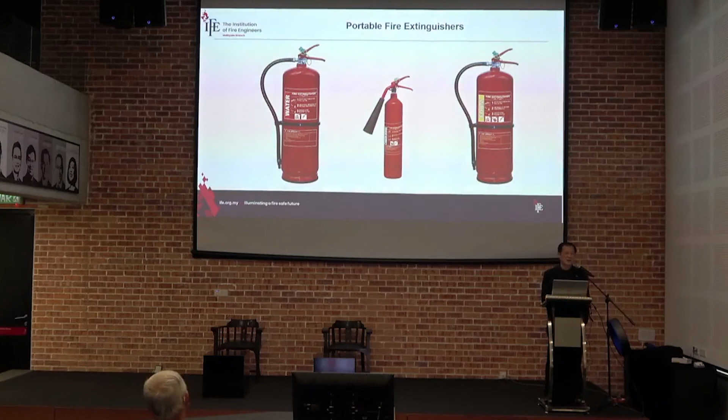Don't use this as a door stop. And how many people check the extinguisher? Nobody.

Human factors, 2 meters. Some of the youngsters, the generation now is about 1.9 and 1.8. How can you have a clear smoke height of 2 meters? You tell me?

So I was looking at these engineers, I was thinking, are you kidding? I'm already 1.75, even at my height I cannot stand under the clear smoke height because they've forgotten you have radiant heat flux, you've actually got a turbulence area. The smoke is not clear cut like that, no. They have a diffusion layer that is about 4 inches. So when you have minimum 2 meters, you actually have less than 2 meters. And this diffusion layer also contains poisonous gas and smoke particles, which is less, that's all.

Everybody talks about figures, but don't understand the philosophy and the fundamentals behind it. If you go to Hong Kong, it's 2.5, and you need a very high ceiling to actually look at the proper egress route design.

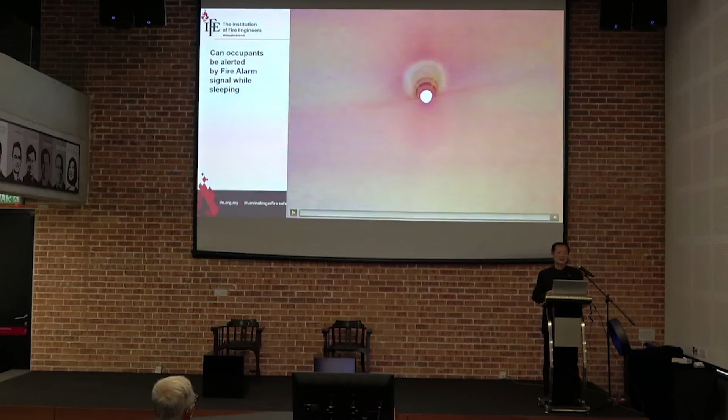This is a smoke detector incorporating an alarm. It's not playing right now, but there's a flashing light and a siren. This actually complies with our Malaysian standard, whereby you need 75 dBA at the bedhead. Okay? It doesn't play, so it can't pass.

So again, human behavior, we are irrational, and most people do not respond to fire alarms. Egress speed differs for different groups. A lot of them say, I don't see fire, I don't see smoke, there's no fire. So I think there should be a rethink about what we've always been doing for the past 10 years, because we can improve, definitely.

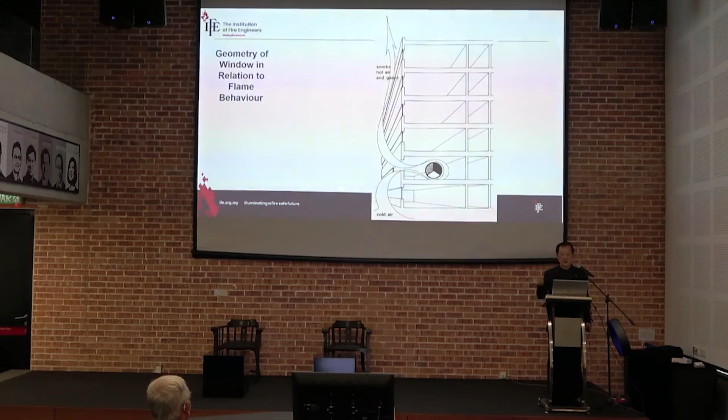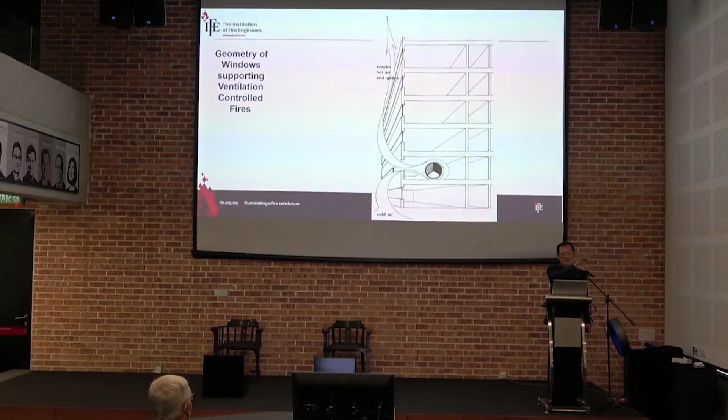I'll show this part, it's very interesting for architectural design. The window design will affect the fire size in the room and how the fire spreads on the facade. This is through research. Because of the ventilation, air comes in to support the fire and hot gas goes out. So if you design the window either horizontally or vertically, there is an impact. You see the difference?

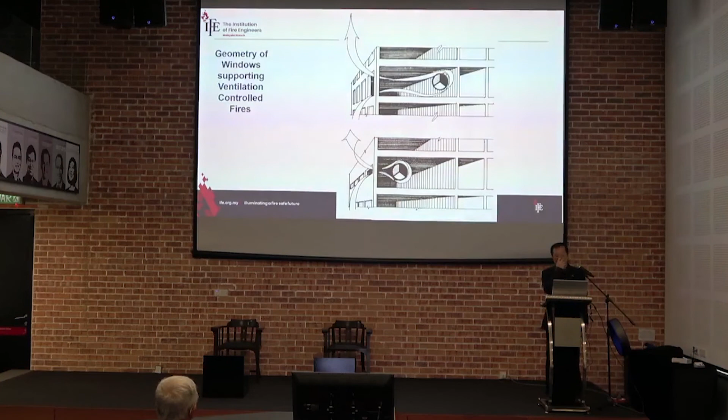Assuming the window size is the same dimension, if you put it vertically versus horizontally, the fire is more ferocious with vertical, because it allows free flow of air to support combustion. The diagram below limits the amount of air coming in, so the fire size is smaller. And if you look at the window size below, with a square window, the fire will be deflected from the building rather than leapfrogging from floor to floor.

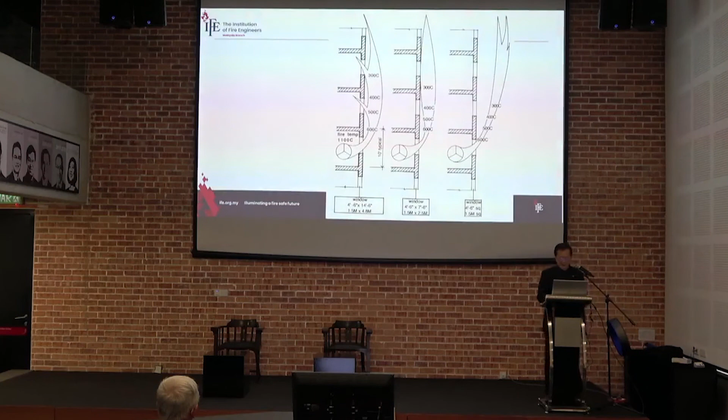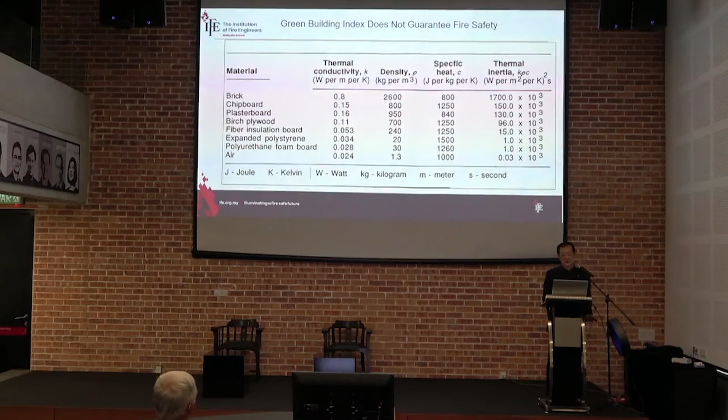These are actual data taken from research, I'll show you this. Looking at the green building index, it doesn't guarantee fire safety, because if you look at the K value, the thermal conductivity value, you understand what I'm talking about. Brick is actually a good conductor but a bad insulator. Air is the best insulator because heat transmission is least. But in between, you've got plasterboard and polyurethane foam, and foam is actually a good insulator but a bad fire safety material. So when you look a bit more into building material science, you understand what I'm talking about.

So, can we design and build a safe habitat?